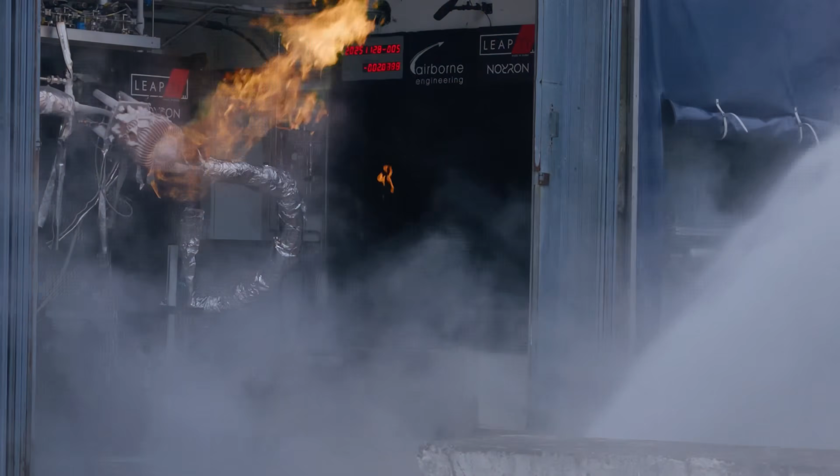Somewhere in Dubai, there's a company with 2 employees. No team of 100 engineers, no research department, not a dozen specialists in fluid mechanics, thermodynamics, and manufacturing processes. Just 2 people and software that accomplishes in a few weeks what engineers have called impossible for decades.

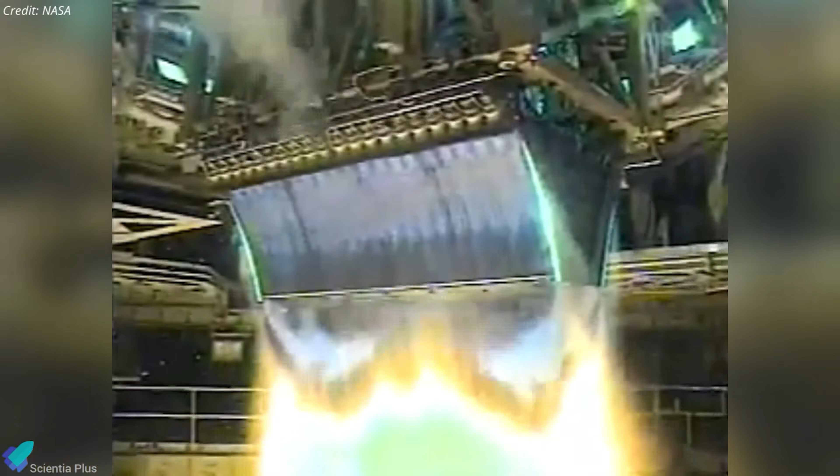In December 2025, this company built 2 rocket engines. Not just designed, but built, tested, and even fired, including an Aerospike engine, one of the most complex and at the same time most sought-after engine architectures in the history of spaceflight. Engines so difficult to manufacture that in 30 years, barely a handful of teams worldwide have managed to get them running, let alone put them into operational use. From specification to first ignition in less than 3 weeks.

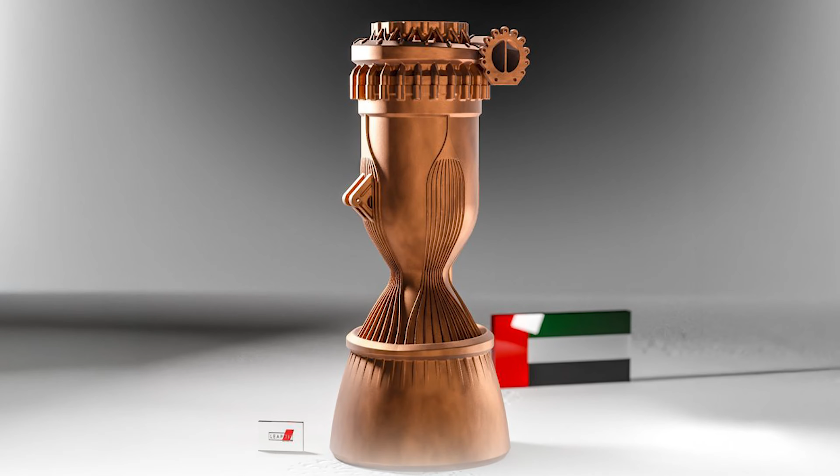The company is called LEAP71, and what they're doing is quietly changing the fundamentals of engineering. My name is Sirwan, and this is Scientia Plus.

Before we dive into the technology, we need to understand the 2 people behind this story.

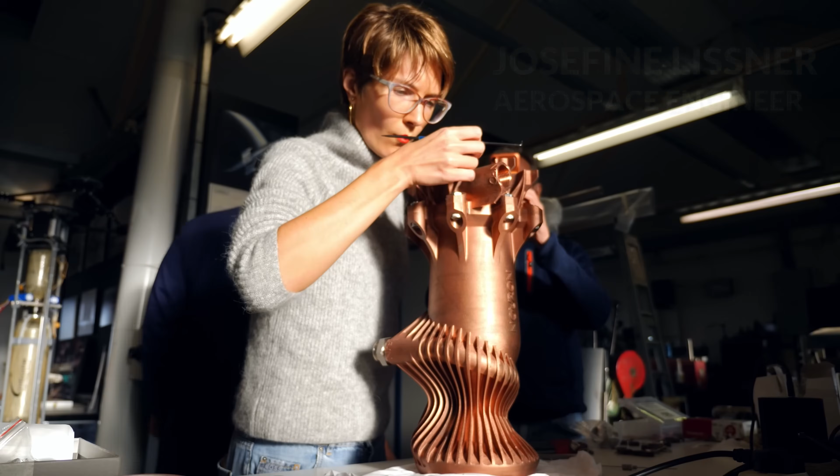Josefine Lissner is an aerospace engineer. She studied at the University of Stuttgart and then helped design the aerodynamics of Lewis Hamilton's championship car at the Mercedes-AMG Petronas Formula One team. She then worked at Porsche Motorsport in their newly founded Formula E team. She is also an ultramarathon runner. In 2018, she won the 110-kilometer Hadrian's Wall ultramarathon.

This is relevant because it reveals something about her way of thinking. Lissner is someone who solves problems through consistent step-by-step work. This shows her uncompromising ambition and perseverance. Besides, it didn't just happen by chance that she ended up working at the top of motorsports.

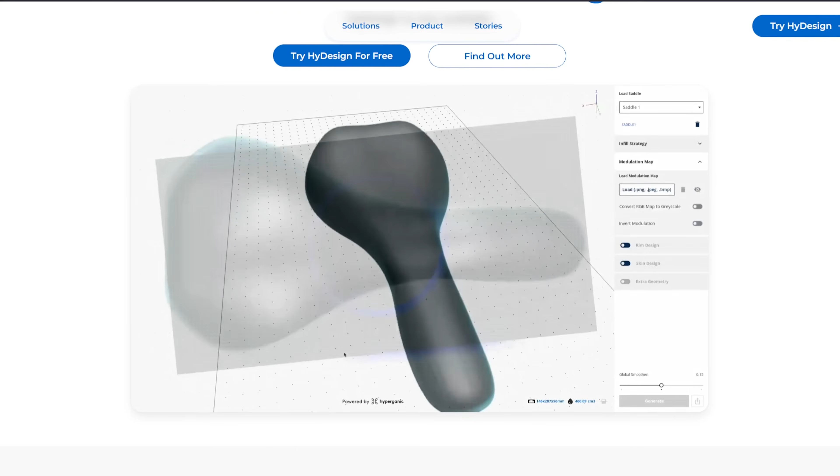The second person is Lin Kayser. He is a serial entrepreneur and has been developing software since his childhood. Before he co-founded LEAP71, he led Hyperganic, a company that also specialized in algorithmic design. There he laid the technological foundation on which LEAP71 is built today. The 2 met at Hyperganic. In 2023, they founded LEAP71 together in Dubai.

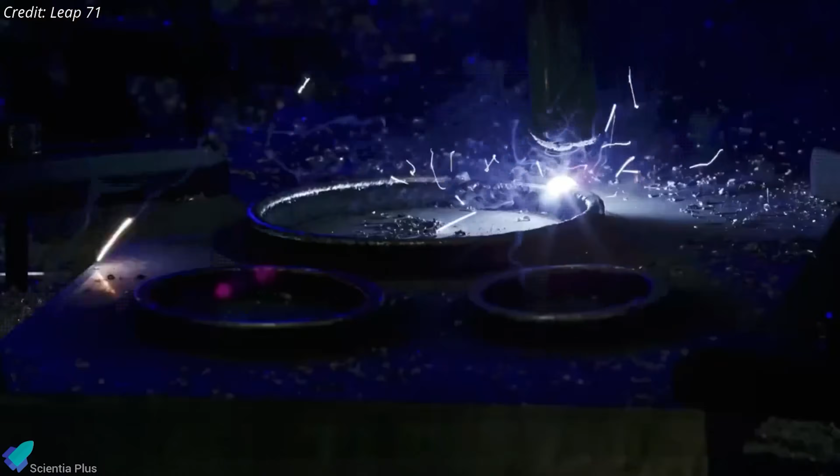And then they did something that has never happened before in the history of engineering. To understand what LEAP71 does, you first have to understand what engineering has been up to now.

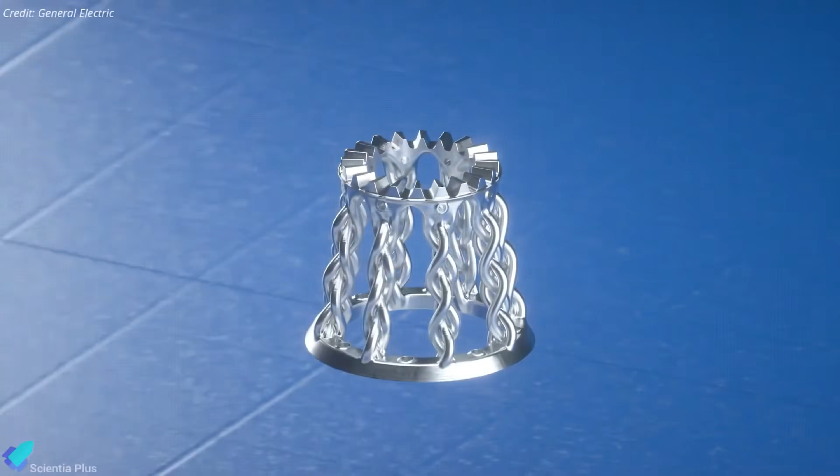An engineer designing a rocket engine spends months, if not years, doing it. He starts with basic physics: thermodynamics, fluid mechanics, combustion theory. He develops concepts, calculates parameters, selects materials. Every curve, every channel, every drilled hole is drawn manually in CAD software. It takes forever because everything has to be done by hand.

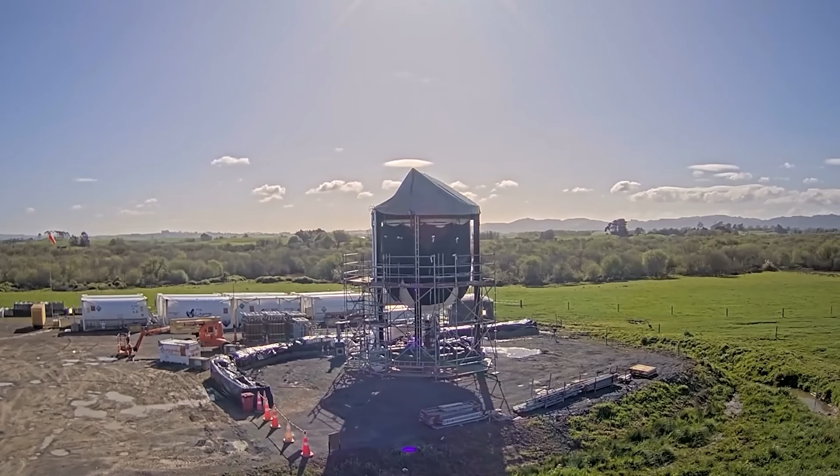Then come simulations, feedback loops, corrections. Then it's manufactured, then tested and analyzed. They then iterate based on the analysis data, meaning the design is revised and the whole loop starts from the beginning. This is done until the test data is satisfactory, meaning it meets the requirements. A modern rocket engine is the result of years of collective human expertise, containing the knowledge of hundreds of engineers over decades.

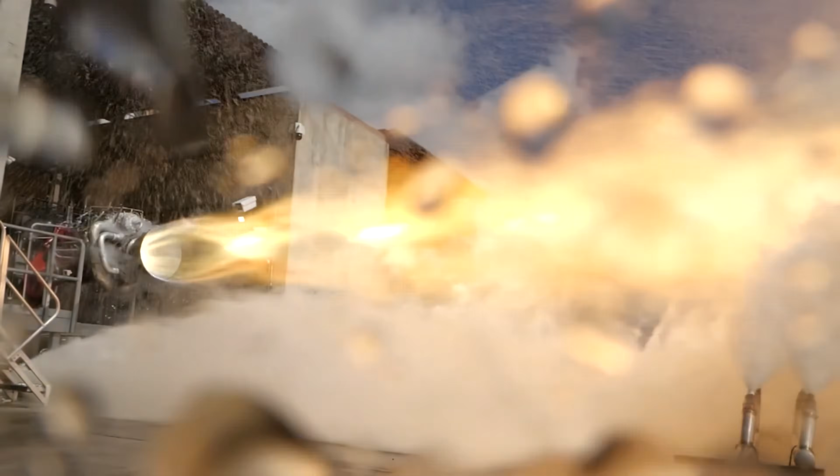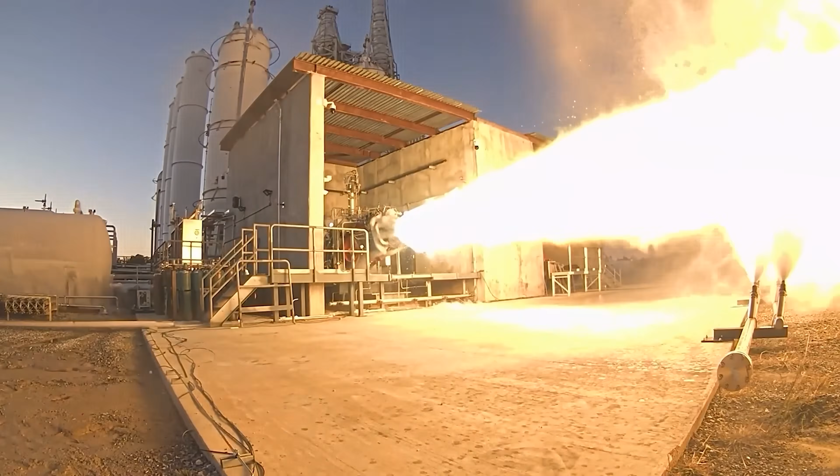And that's exactly the problem, says Kayser. Engineering, he argues, is incredibly slow because it was never truly computerized. Computers were used in engineering as a drawing tool, as a simulation tool, but the actual thought process, the actual design logic, always remained with humans. LEAP71 wants to change that.

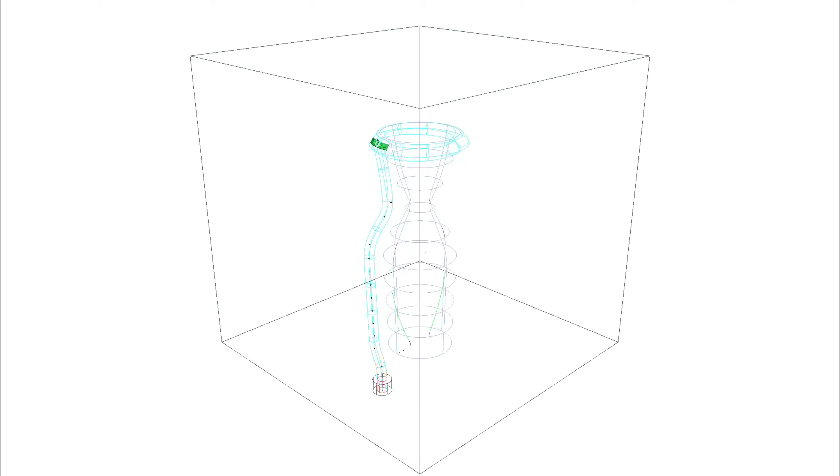They don't call their approach AI, nor do they call it a generative system, even though it closely resembles one. They refer to their approach as computational engineering, meaning computer-aided engineering. A little bit of marketing is necessary too, and that's perfectly fine. The heart of LEAP71 is a piece of software called Noyron.

Similar to the word neuron, as in a nerve cell, just spelled differently. Noyron is not a CAD program, AI assistant, and not an algorithm in the classical sense. Noyron is, and this is the precise description, a large computational engineering model, a system that has translated the entire logic of engineering into code. That means physics, manufacturing rules, material properties, and practical experience from real-world tests, all coded into a deterministic system based on fundamental physical principles.

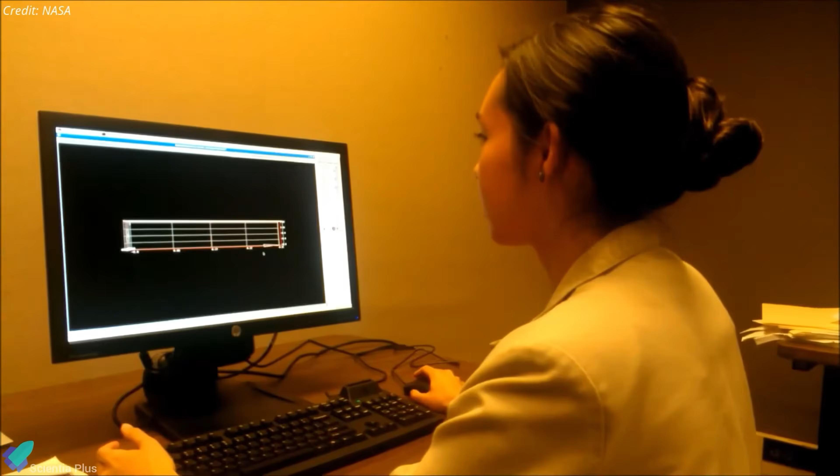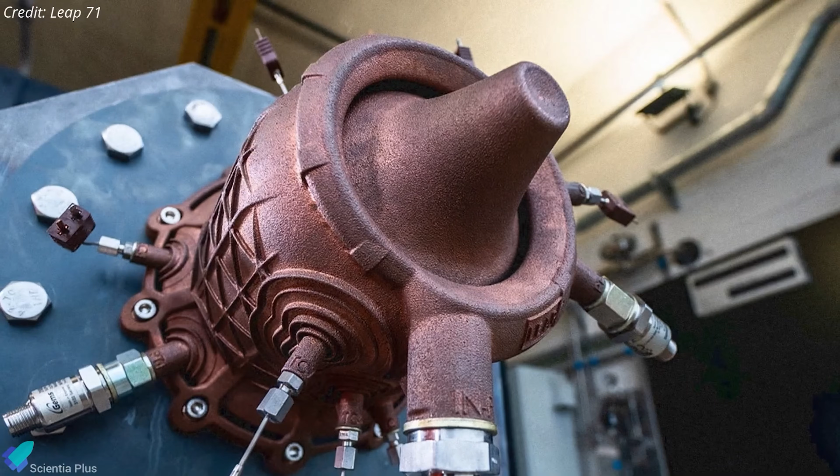You give Noyron a specification. For example, I need an engine with 20 kN of thrust, powered by liquid methane and liquid oxygen, suitable for orbital applications. Noyron generates the design as production-ready geometry, immediately ready for additive manufacturing, so for 3D printing. You don't just get rough sketches or ideas, but truly finished designs. That's the difference compared to everything that has existed so far.

Noyron doesn't generate images or texts, it generates physical objects that have to work in the real world. And physics doesn't allow any mistakes.

Lissner describes it like this: when an engineer meticulously translates his knowledge and methods into computer code, he becomes orders of magnitude faster. That doesn't replace the engineer, but multiplies productivity. That is the philosophical core of LEAP71, engineering encoded in a system that executes it at the speed of computers.

Now we come to the results, because theory is one thing, fire is another. Big claims are made every day. The question is whether they can actually be put into practice.

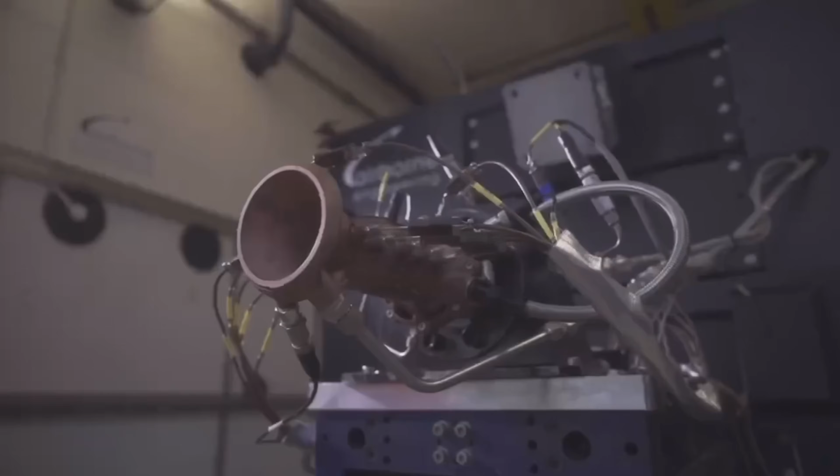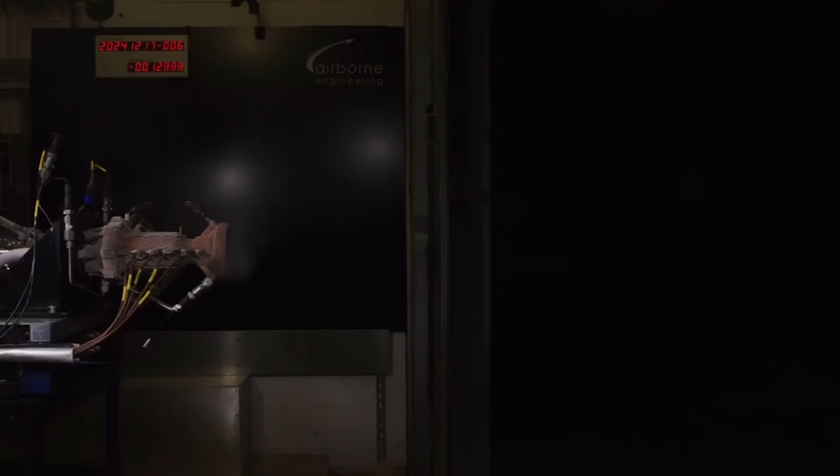In June 2024, less than a year after its founding, LEAP71 tested an engine generated by Noyron for the first time, with 5 kilonewtons of thrust. Completely designed by the software, completely printed in copper using additive manufacturing, no manual intervention in the geometry. And lo and behold, it worked on the first try.

That's an almost unheard of occurrence in engine construction. Engines rarely work on the first test. It's normal to test, analyze, correct, rebuild, and test again. This cycle typically takes months.

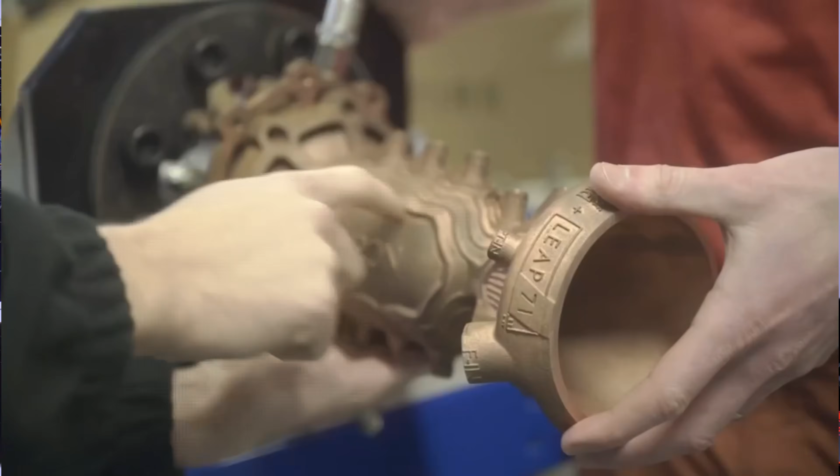LEAP71 simply skipped it. The comparison might be a bit off now, but it's kind of like meeting for a first date and 3 weeks later you're holding a baby in your hands.

After that, more tests followed. Engines with different thrust classes from 1.5 to 7.5 kilonewtons, with different materials and different configurations. Always the same pattern: specification in, design out, print, test, and it kept working every time. That's really impressive, because there are certainly occasional lucky hits, but delivering repeatable results is a whole different thing.

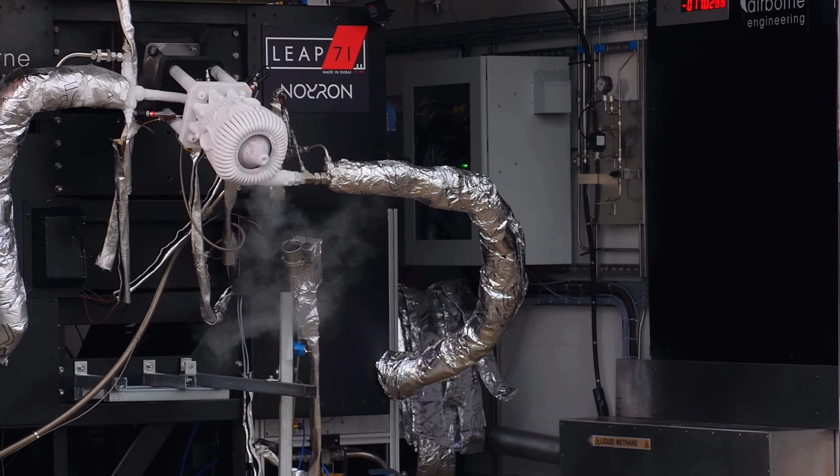And then, in December 2024, something happened that made the spaceflight community sit up and take notice: the Aerospike engine. To understand why this is so significant, we first need to briefly explain what an Aerospike actually is, and why, for decades, it has been considered the most difficult engine architecture in history to master.

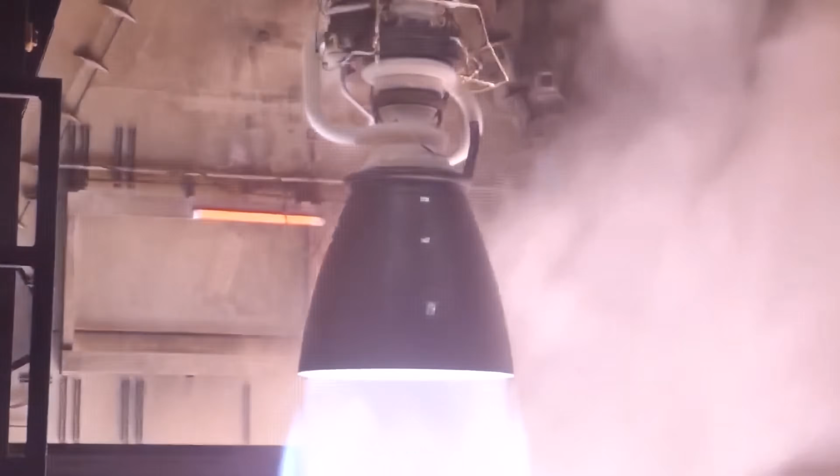Conventional rocket engines have a bell shape. This bell is designed to work optimally at a specific atmospheric pressure, either at sea level or in a vacuum. The problem? An engine that works optimally at sea level is inefficient in a vacuum, and vice versa.

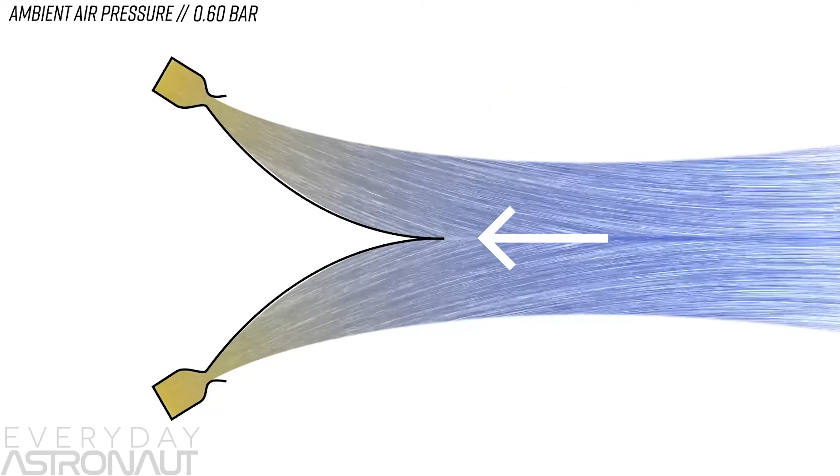An Aerospike solves this problem with a radically different design. Instead of a bell, it has a central spike, with a ring-shaped combustion chamber around it. The exhaust gases flow outward and automatically adapt to the ambient pressure. That makes the Aerospike more efficient than any bell nozzle from sea level all the way to vacuum.

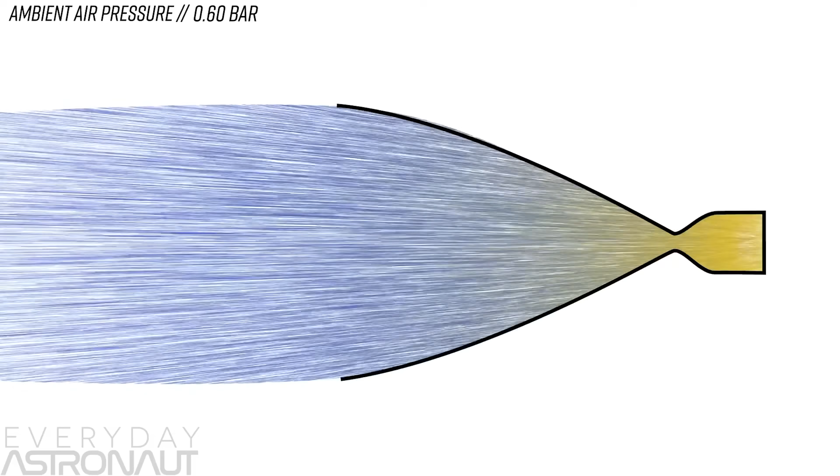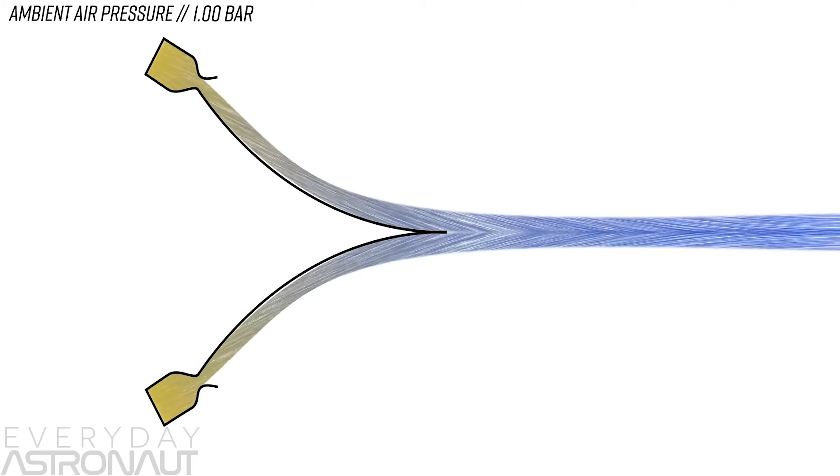That sounds perfect, so why doesn't everyone build an Aerospike engine like that? Because they're brutally difficult to manufacture. The internal geometry is so complex that conventional manufacturing methods can hardly produce them. Cooling the spike is a thermodynamic nightmare. And controlling the flow behavior of the exhaust gases in this inverse, upside-down architecture, requires an understanding of physics that is at the very limit of what is possible even for experienced engineers.

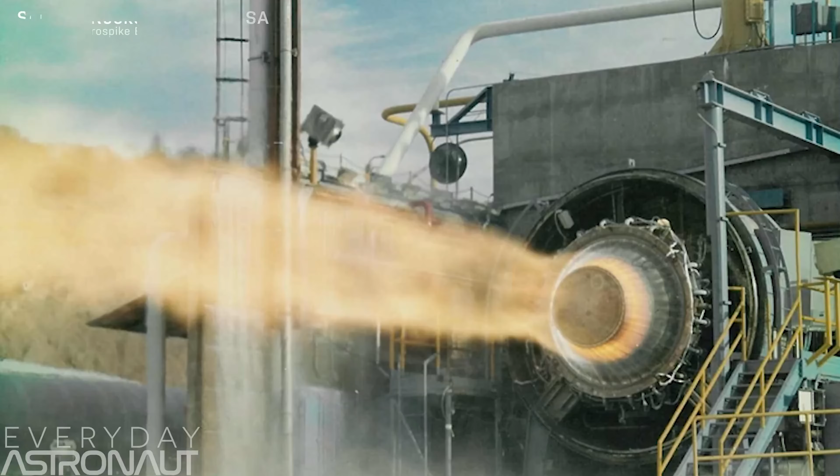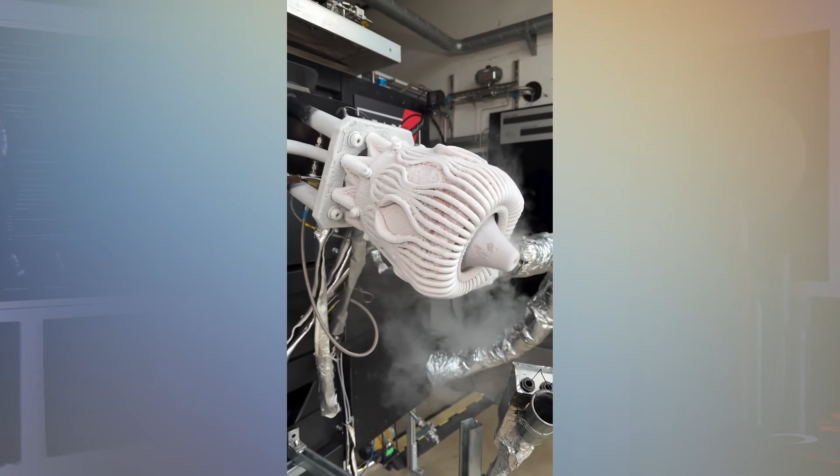In 30 years, only a handful of teams worldwide have successfully tested an Aerospike engine. LEAP71 did it in just a few weeks. The fully 3D printed copper engine with 5 kilonewtons of thrust worked on the very first test. And that was just the beginning. Short pause, because this moment deserves it.

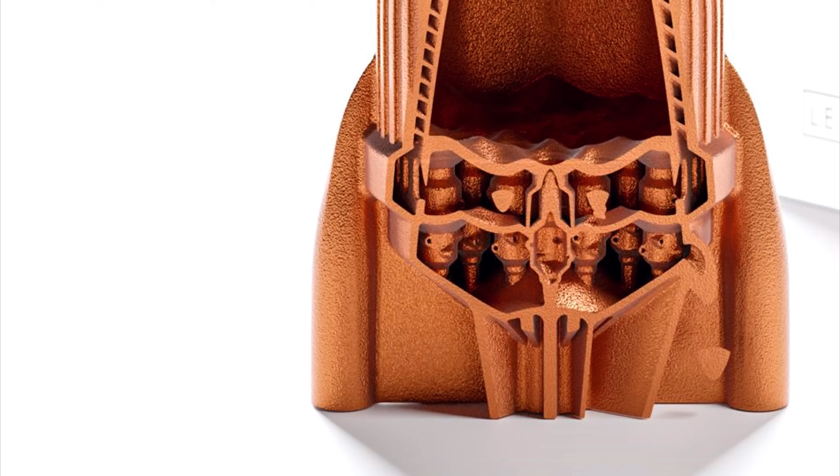Both burned with liquid methane and liquid oxygen, the so-called methalox fuel. The same fuel that SpaceX uses in the Raptor engine of Starship and Blue Origin uses in its BE-4 engine on New Glenn. The same fuel that is considered the future of rocket engines.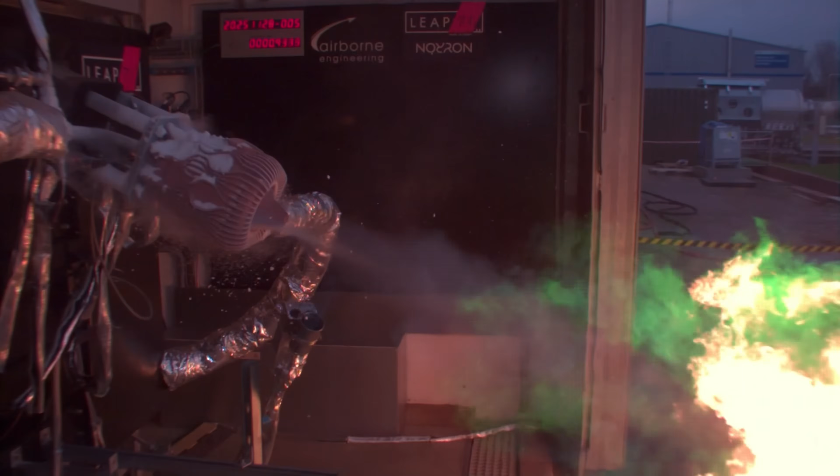That's completely absurd in the best sense, of course. For comparison, a typical commercial rocket engine development program takes 3 to 5 years, sometimes longer in the best case. The Raptor engine from SpaceX has been in development for over a decade now, but what LEAP71 produced in March

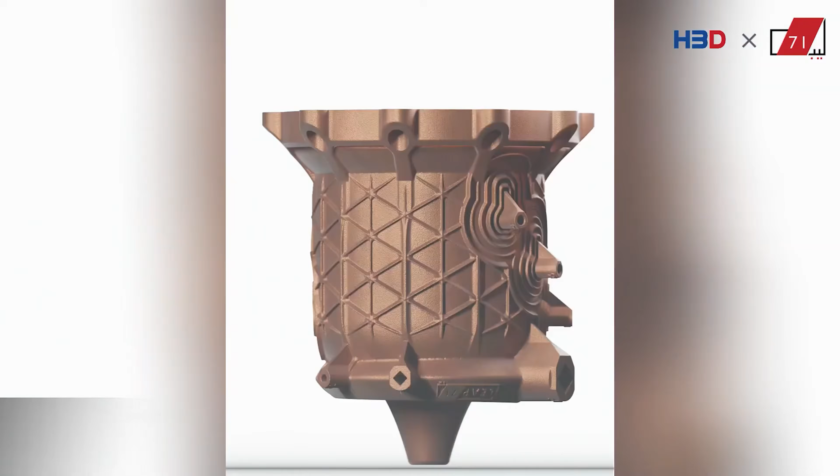2026 surpasses even that. In collaboration with H3D, a Chinese manufacturer of large-scale metal printing systems, LEAP71 has produced the largest 3D printed Aerospike ever made. The engine is designated XRA-2E5.

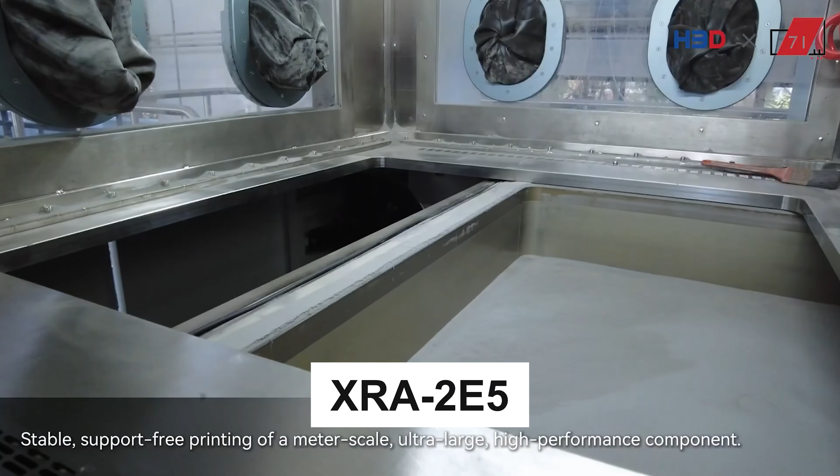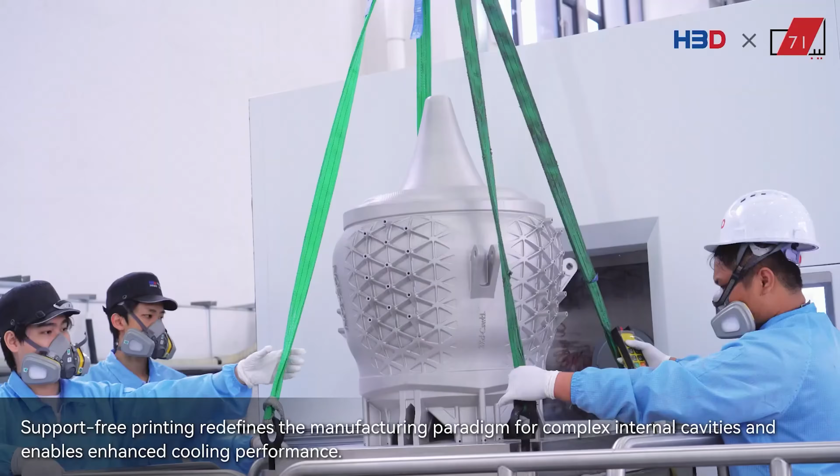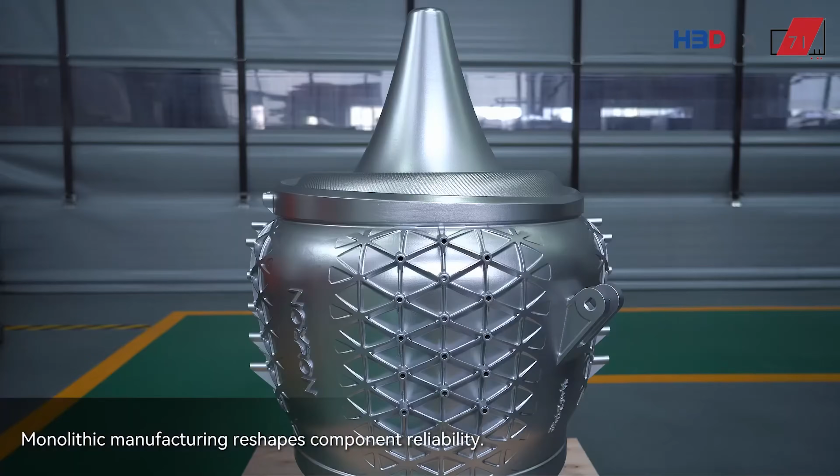The naming may still leave something to be desired, but that's not the main point here. The engine is 1 meter tall, produces 200 kilonewtons of thrust, which is about 20 tons, and also burns with methalox. It was completely printed from Inconel 718, a high-temperature resistant nickel alloy that is the standard for 3D printed rocket engines. The printing took 289 hours, so a little more than 12 days, continuously with a 10 laser system, one of the most powerful metal printing systems in the world.

Please take a moment to realize what we're talking about here. If you had said things like this a few years ago, you would have been committed on the spot.

The result is a monolithic object, a single component that contains everything that used to be made up of hundreds of individual parts that were milled, welded, riveted, screwed, sealed, and assembled. No seals, no screws, no connection points where pressure or temperature could endanger the system. Here, the philosophy, the best part is no part, is taken to the extreme. So parts that don't exist can't fail either.

Lissner describes Aerospikes as the holy grail of space propulsion and at the same time explains why they are so difficult to manufacture. The complex geometry has historically made them extremely difficult to design and manufacture. And the combination of computational engineering and large-scale additive manufacturing makes it possible to actually produce this grail.

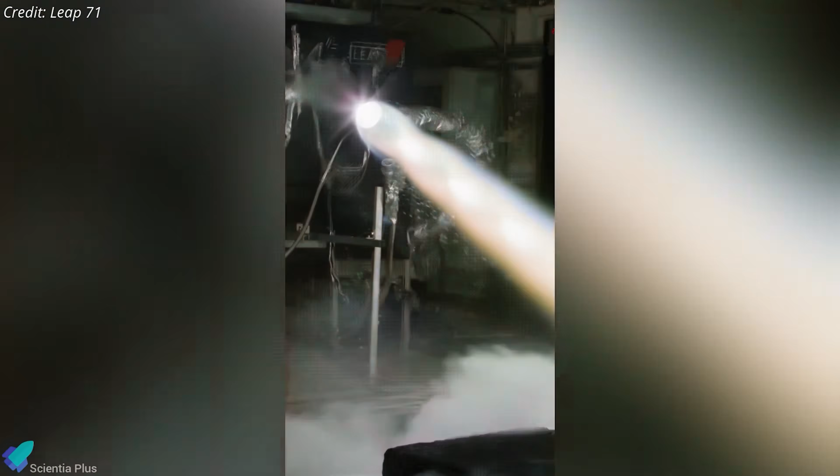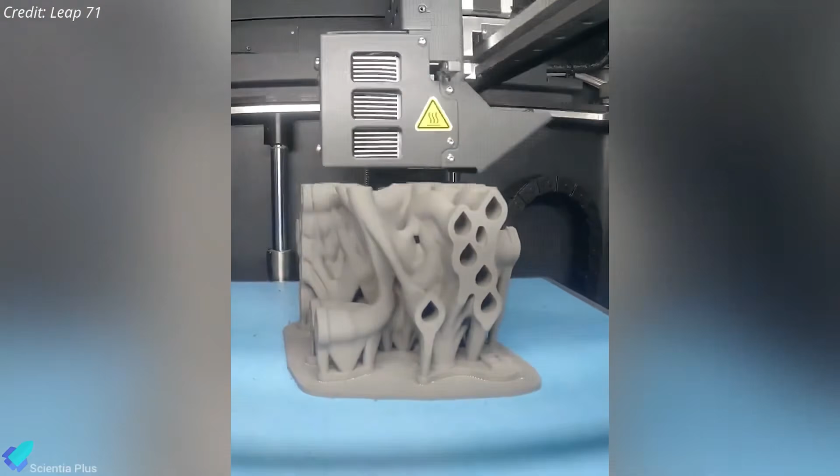We've mentioned it briefly, but now we need to explore the technology in more detail. Because there's a question that inevitably arises with all of this: what exactly is Noyron? And even more importantly, what is it not? That's important because the term AI is used so excessively in public discussions that it's almost lost its meaning. ChatGPT is AI. Image generators are AI. Recommendation algorithms are AI. And now rocket engines too?

The answer? Noyron is AI, but a completely different kind of AI. Generative AI systems like large language models work probabilistically, meaning they operate with probabilities. They have no real understanding of the world. They have learned patterns from enormous amounts of data and can convincingly reproduce these patterns. That is powerful, but it is also prone to errors. A language model can give wrong answers with great confidence because it doesn't know the truth. It only knows what sounds probable.

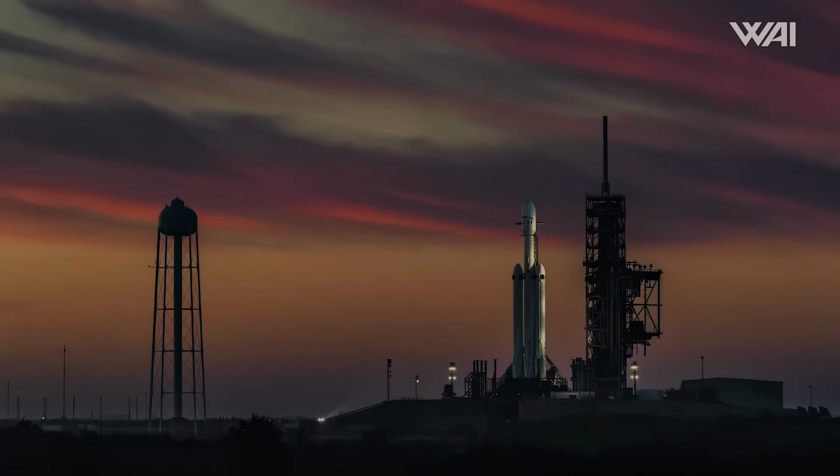That works for text and now also quite well for images. And even for videos now. But certainly not for rocket engines. A rocket engine that collapses at 1,500 degrees Celsius and a chamber pressure of 300 bar can have fatal consequences. Physics does not allow

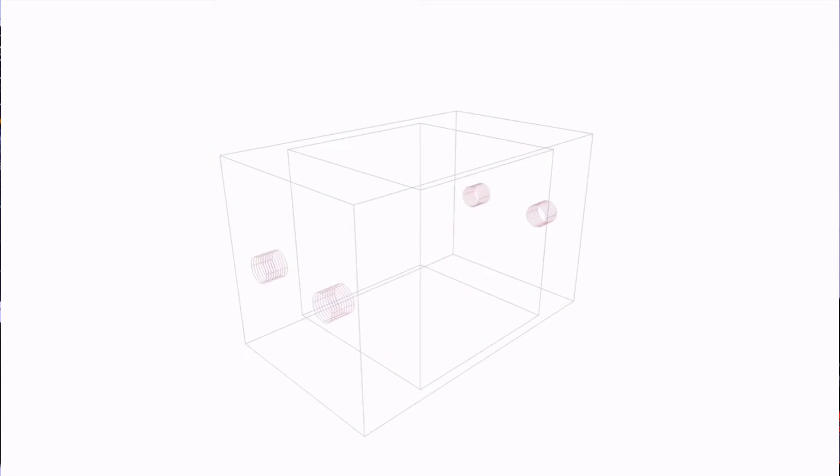probabilistic approximations. Noyron is therefore deterministic. It is not based on statistical patterns from training data. It is based on encoded physics, thermodynamics, fluid mechanics, material science, and manufacturing conditions. All of this was translated by Lissner and Kayser into explicit, verifiable logic in code. That means Noyron doesn't make predictions. It calculates. Calculations are traceable, verifiable, and reproducible. Exactly what you need when working with fire and high-pressure gases.

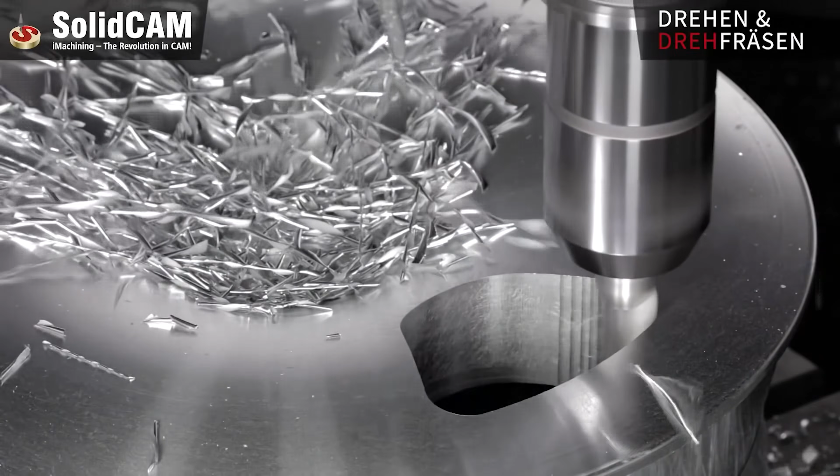There is a second technological pillar without which LEAP71 wouldn't work: additive manufacturing, 3D printing in metal. Conventional manufacturing is subtractive. You start with a metal block and mill, turn and drill until the desired shape remains. That works excellently for simple and moderately complex geometries. But beyond a certain level of complexity, it becomes impractical. Internal channels that snake through a component, cooling structures that run through the material like veins, geometries that need to be accessible from the inside. All of that is either impossible or insanely expensive with subtractive manufacturing.

Additive manufacturing turns the principle around. You start with nothing and build up layer by layer.

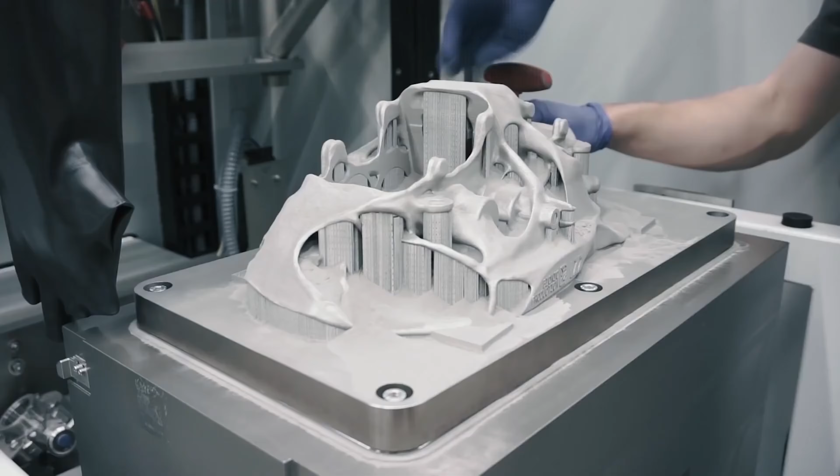The complexity of the component doesn't cost anything extra. A simple sphere is just as labor-intensive to print as a highly intricate integrated cooling system. Put the file into the software, slice it, and you're good to go. That's a simplified explanation, but crucial for Noyron.

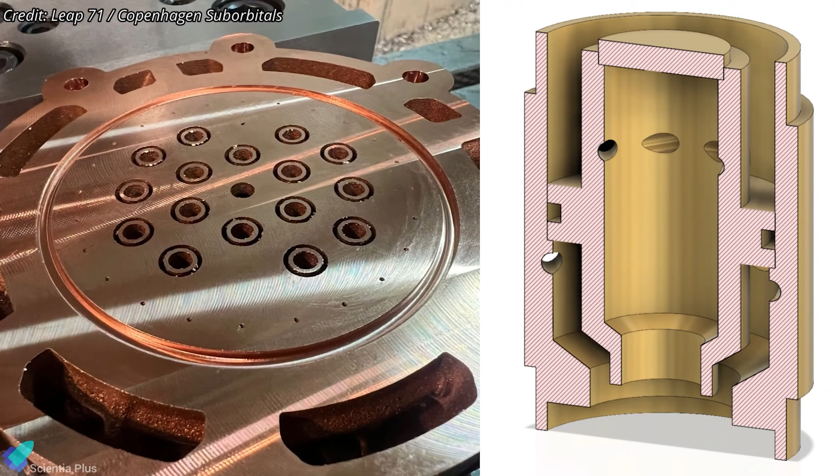Because Noyron isn't limited by the logic of conventional manufacturing data or techniques, it can generate geometries that no human would ever have drawn manually. Not because no one could, but because the manufacturability of such shapes simply wasn't possible before. The result is engines that look like living structures, cooling channels that wind organically through the material, injector heads whose density and complexity are reminiscent of coral reefs, structures optimized to deliver the greatest possible performance with the least possible material. Even though it looks beautiful, this isn't about aesthetics, it's about physics.

Speaking of 3D printing, here in the studio we currently have the Raptor engine from SpaceX and the iconic F1 engine from the Saturn V, not made of Inconel, but of PLA. But it's still impressive that someone like me can just make this at home.

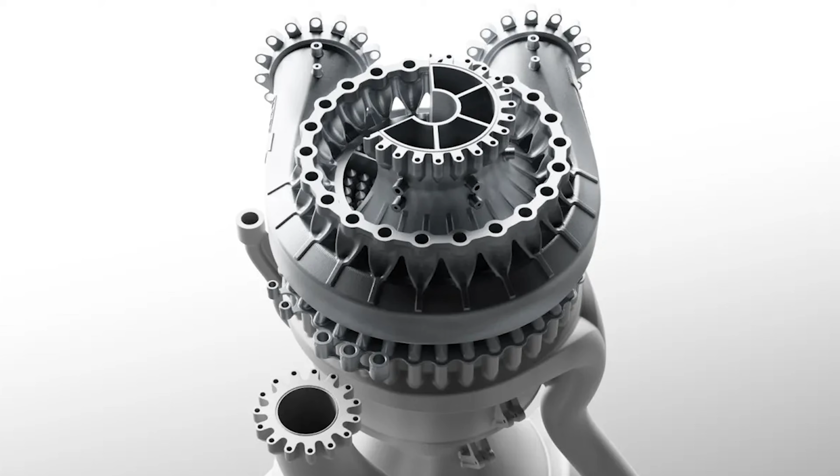In November 2025, LEAP71, together with Nikon SLM Solutions, a German pioneer in metal printing, produced the injector head of an engine in the XRB2E6 class. 600 mm in diameter, one of the largest and most complex 3D printed aerospace components ever produced.

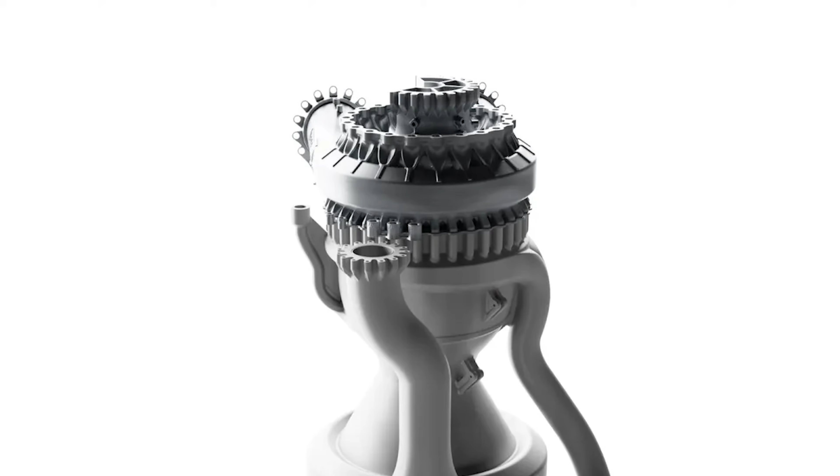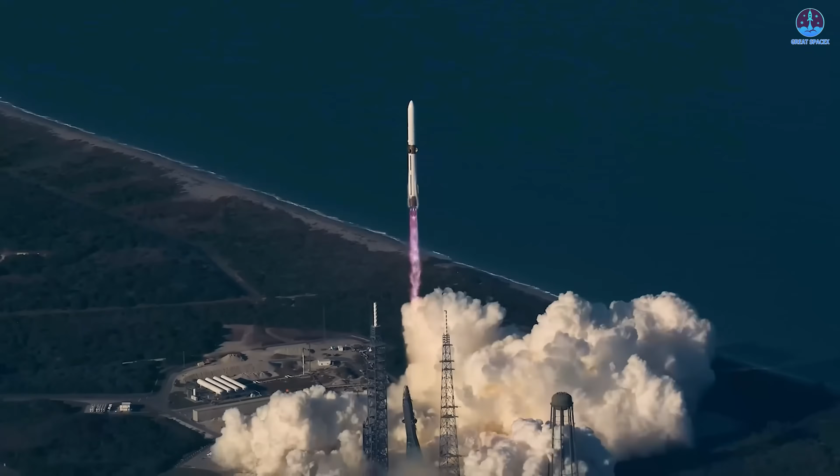The XRB2E6 is a Methalox engine with 2000 kN of thrust, so 2 meganewtons, or about 200 tons. For comparison, the Raptor 3 engine from SpaceX, the most powerful production engine in the world, produces about 300 tons of thrust, and Blue Origin's BE4 about 280 tons. LEAP71 is therefore in the same performance class.

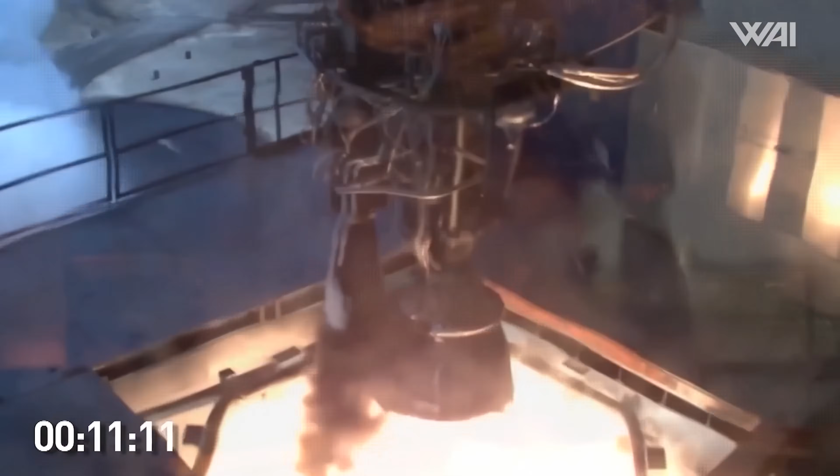And even more radical, the engine is designed as a full flow staged combustion engine, FFSC. So, full flow staged combustion. That's the same cycle used by the Raptor engine, the most efficient, complex, and difficult cycle of chemical rocket propulsion. For decades, it was considered too difficult for most players in the industry.

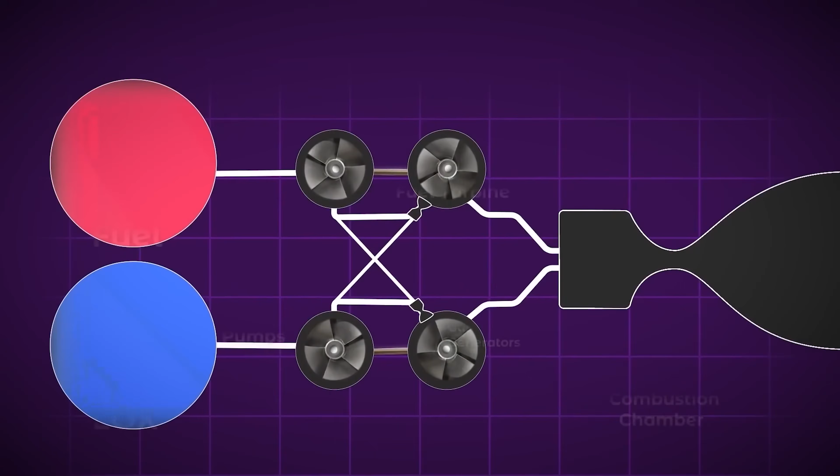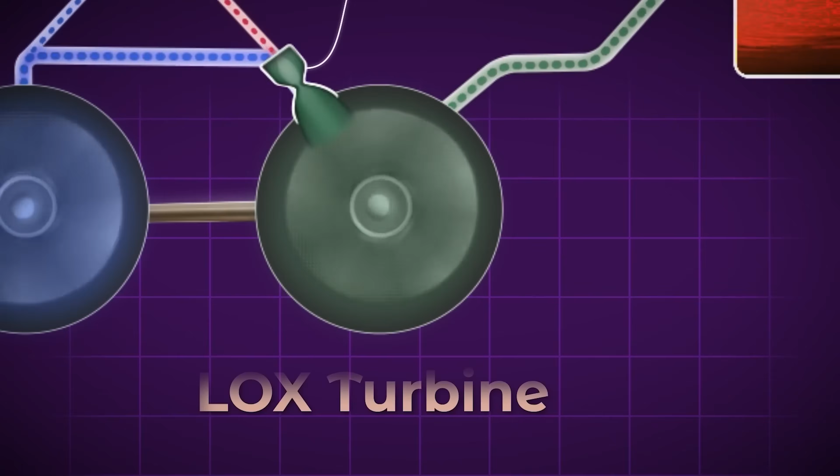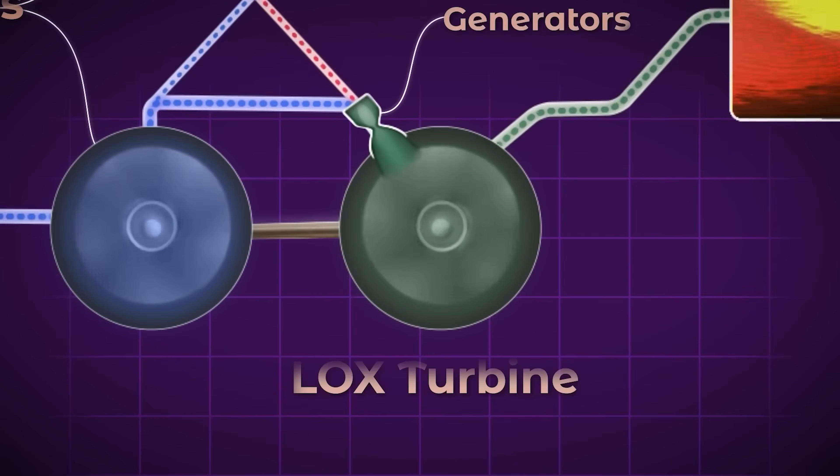What's special and at the same time challenging is that with the FFSC, both engine components are completely routed through their own preburners before they enter the main combustion chamber. Each component drives its own turbopump in the process. That maximizes efficiency, but it also means hot oxygen-rich gas flows through one side and hot fuel-rich gas flows through the other, both under enormous pressure and extreme temperatures. The system has to control that instability while keeping all flow and burn rates balanced. That's exactly what made it virtually impossible for decades.

Don't worry, it only sounds so complicated because it actually is. SpaceX took years to master this cycle. LEAP71 generates the injector head for this completely autonomously, without any human intervention in the geometry.

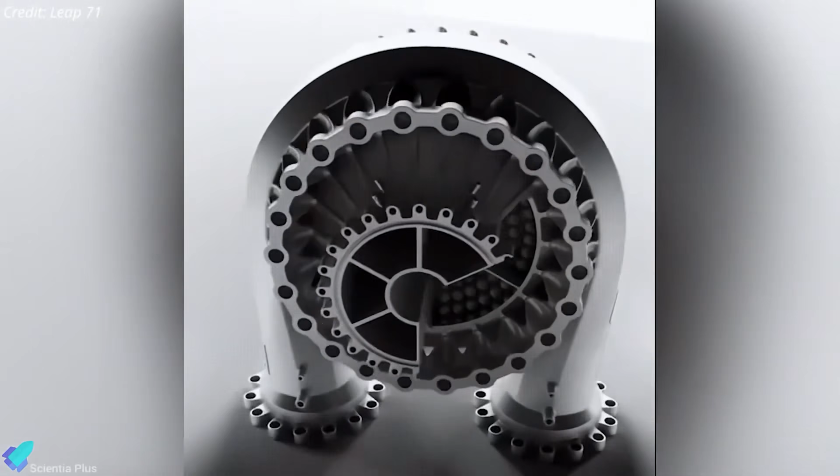What does that mean strategically? The classic bottleneck in rocket development was never the physics. We've known the equations for decades. The bottleneck was time and expertise. An experienced propulsion engineer is rare. In addition, he needs years of training, years of experience, and even then, his capacity is limited. We humans only have a limited number of productive hours per day.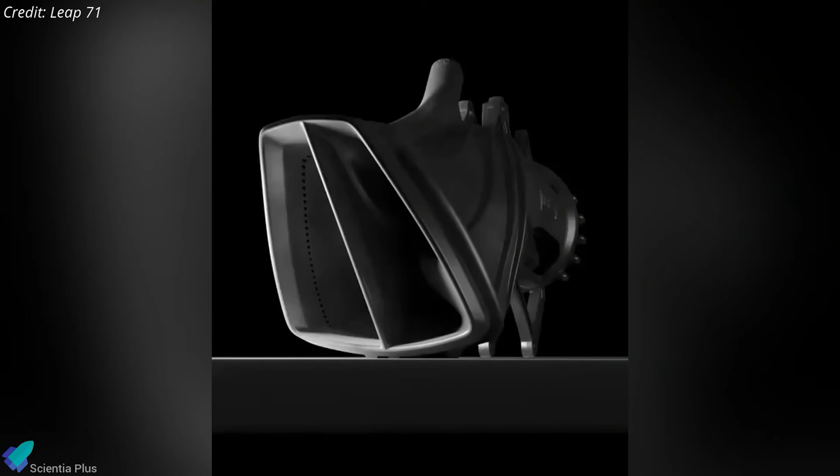That changes the game for everyone who wants access to space propulsion. Not just for major powers with huge defense budgets, but also for small companies, emerging countries, and players who couldn't afford their own engine development until now. This is exactly what LEAP71's partnership strategy shows. In June 2025, LEAP71 entered into a strategic partnership with Aspire Space, a Luxembourg-based space company that has since moved all its primary operations to the United Arab Emirates.

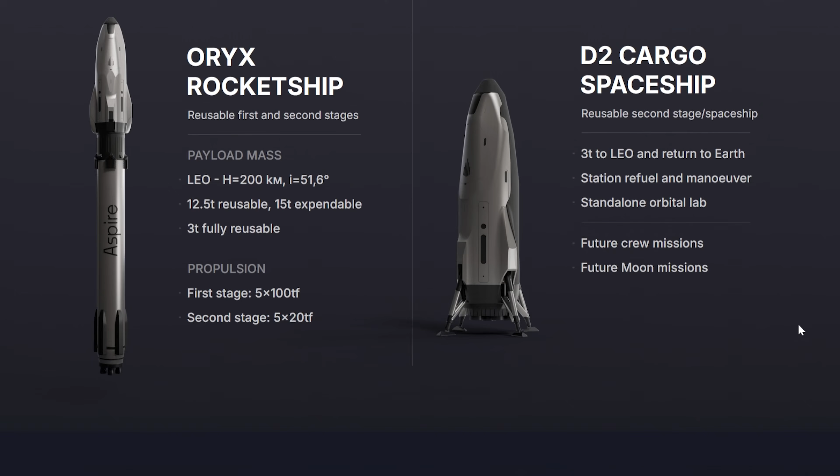Aspire wants to develop a fully reusable launch vehicle system that can deliver up to 15 tons to low Earth orbit. The entire propulsion system comes from LEAP71, with the kind support of Noyron. In March 2026, the Exploration Company, a European space company with over 400 employees known for the Nyx resupply capsule and the Typhoon engine, signed a 5-year license agreement for Noyron RP. The Exploration Company will integrate the software into its own engine development.

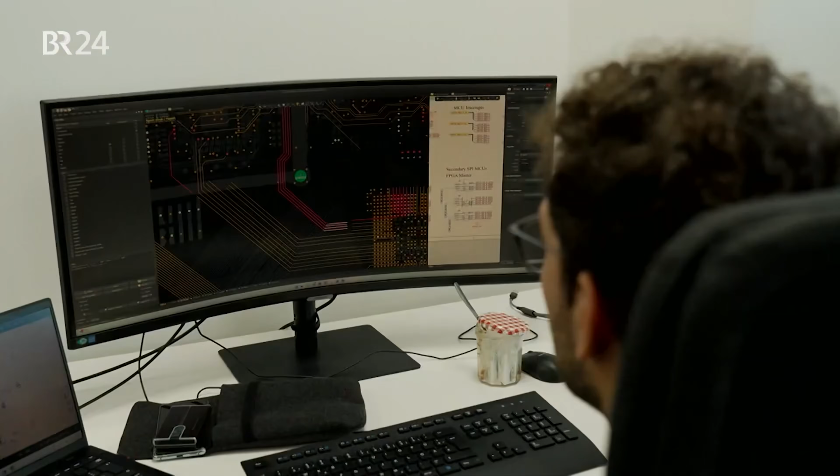That's a significant signal. They're not a startup in some garage. This is a serious European space company that actively works with ESA and private customers. And they trust LEAP71 with part of their core technology.

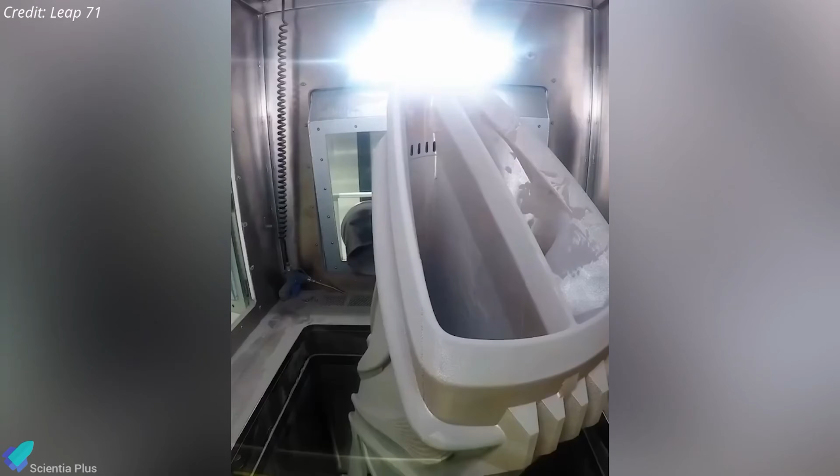In addition, LEAP71 has presented a concept for a hypersonic pre-cooling system in cooperation with Farsoon Technologies. 1.5 meters tall, with a single purpose: to cool air at hypersonic speeds enough for an air-breathing engine to work. The key building block for single-stage spacecraft that take off like an airplane and fly directly into orbit. Single stage to orbit, SSTO. A dream of spaceflight for decades. Technically out of reach for decades.

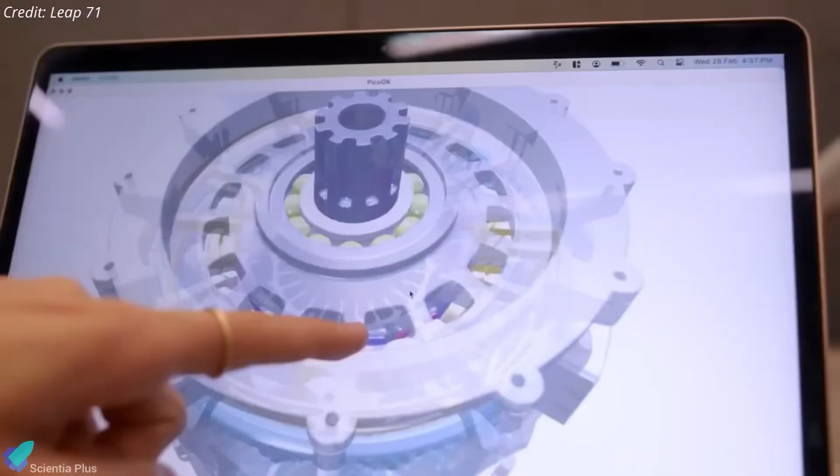The pre-cooler is still just a concept, but the concept exists. Printed, measurable, tangible, and at their speed, it's a matter of weeks before we see hardware and initial tests.

I'd like to pause for a moment here, because LEAP71 is a small company that produces extraordinary things. But it's important to be honest about where we are in this process. The engines have been tested, but not all of them are certified for orbital use. Validating an engine for space use, especially for manned missions, is a long, rigid process. Hundreds of tests, qualification runs, and safety verifications. And that's a good thing.

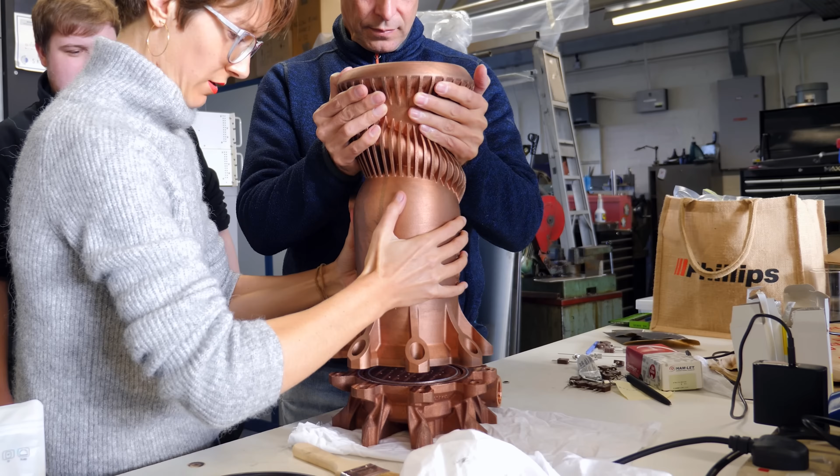LEAP71 is still in the basic validation phase. They are proving that their methodology works. Noyron can generate engines that ignite on the first try. That's remarkable, but it's not the same as a qualified propulsion system for an orbital mission. The road from here to there is still long, and it will show whether the methodology holds up under the pressure of a full qualification program.

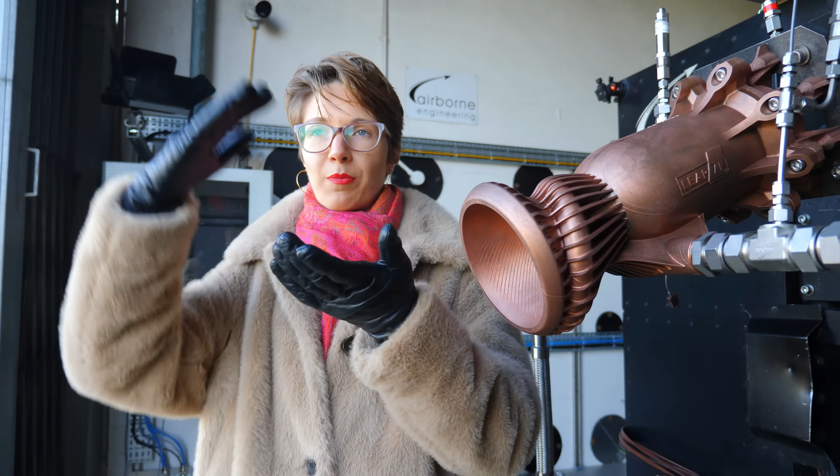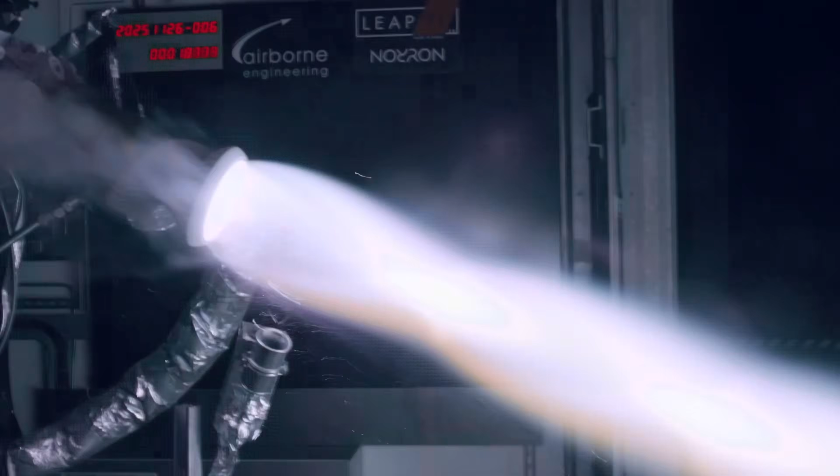But the starting point is so strong that the question is no longer if, but when. So next, the 20 kilonewton that LEAP71 tested in November 2025 corresponds, according to their own statements, to about 10% of the thrust class they want to test in 2026. That means by the end of this year, LEAP71 is planning a hot fire test in the 200 kN class, 20 tons of thrust, and the manufacturing validation, which is the foundation for the meganewton engine, is already underway.

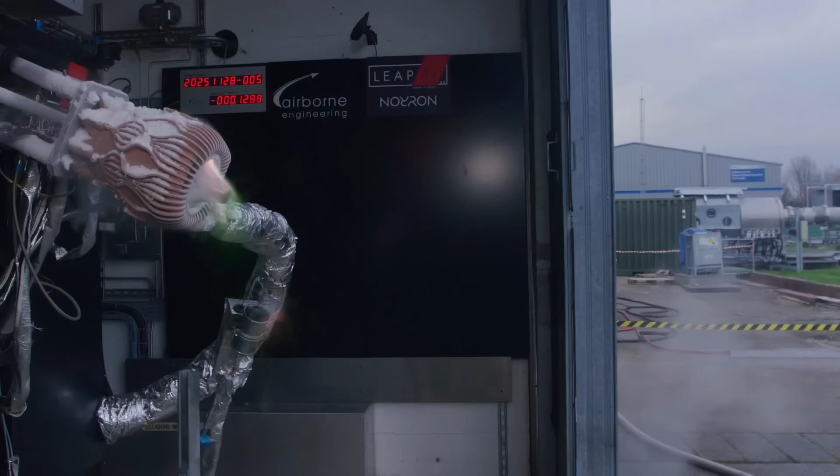World's largest metal printing systems. If LEAP71 sticks to these schedules, the company will have validated engines in a performance class that enables real orbital missions by the end of 2026. Two people, three years from zero to rocket engines in the meganewton range. There is no equivalent to that in the history of engineering.

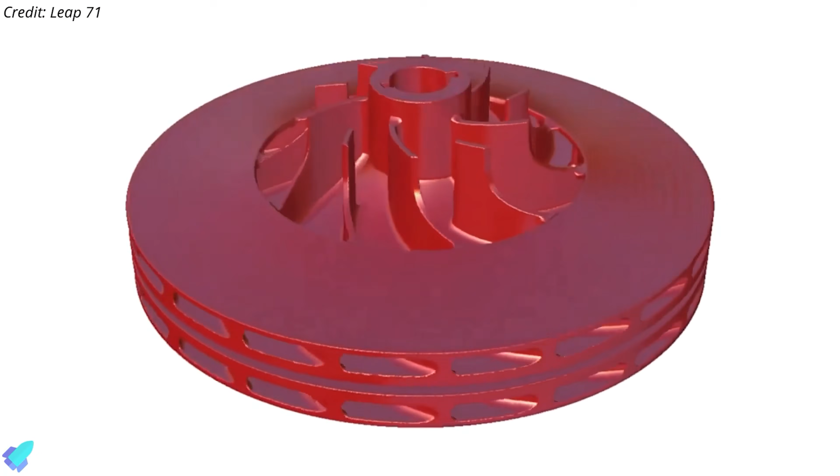But the real significance of LEAP71 doesn't lie in the engines. The engines are the demonstration. The real innovation is the insight behind it. Engineering has been a linear process until now. Idea, calculation, design, manufacturing, testing, iteration. Each step took months. Every mistake cost time and money, and that limited what was possible. Not the physics, not the material, not the money, but the time. Noyron radically reduces this time by orders of magnitude.

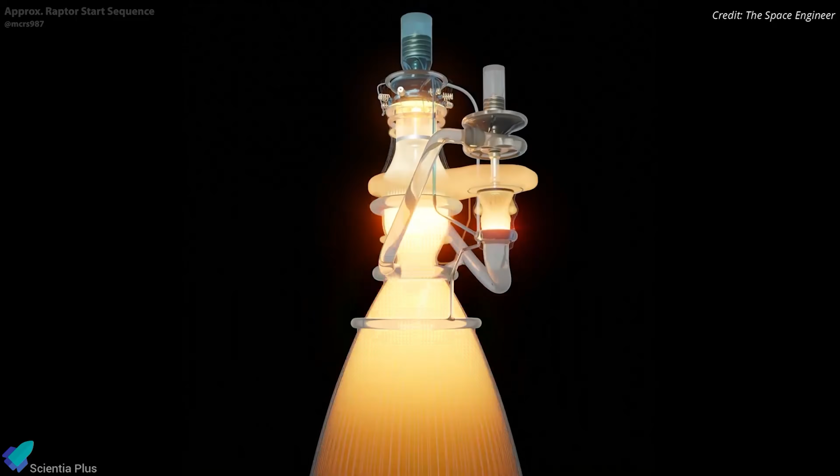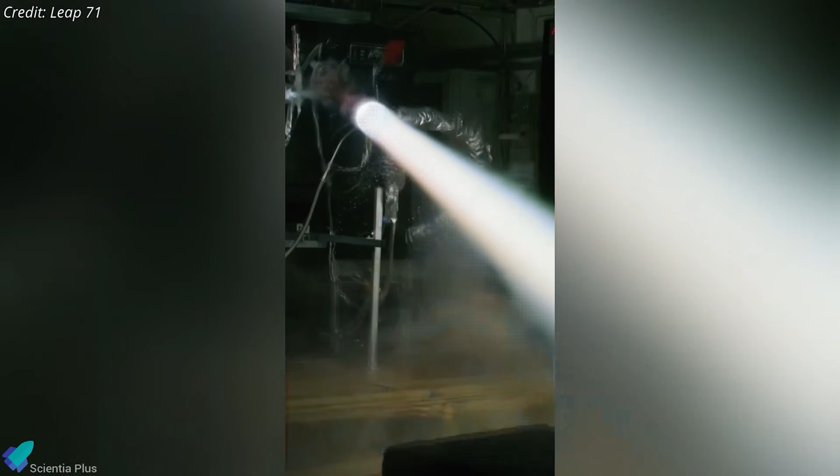And once this methodology is applied to fields like heat exchangers, drive systems for electric mobility, biomedical implants, construction components for satellites or architecture, then we're talking about the question of how humanity will build things in 20 years. Lissner put it this way in an interview: engineering knowledge, which until now was stored in the minds of experts and lost when they retired, can now be encoded into systems that preserve it forever and make it accessible to everyone. It's nothing less than the democratization of engineering.

Two people, one office in Dubai. Software that designs in seconds what takes people months, and engines that fire on the first try. LEAP71 is the most important unknown company in spaceflight.